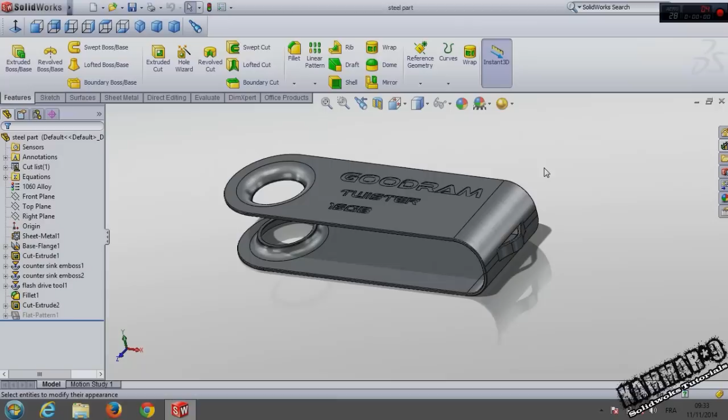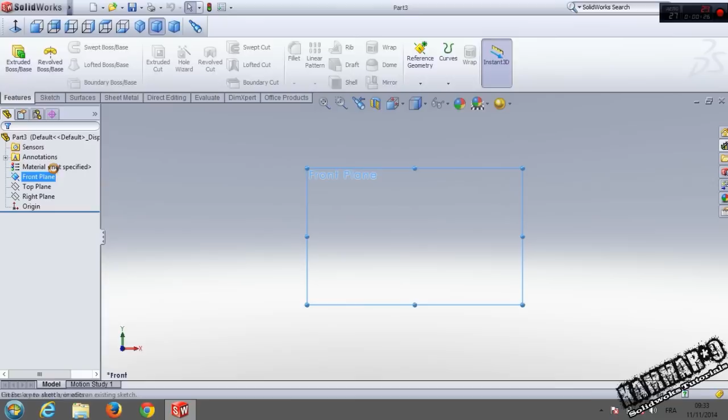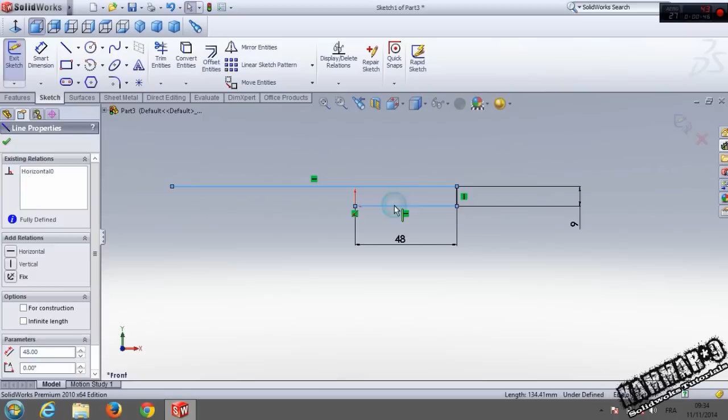Okay, part, choose the front plane, sketch a line from here and add dimension. We have 48 here, we have 9 here, and add the relation: this one and this one, make equal. Now I will add a sketch fillet with 4 millimeter to each.

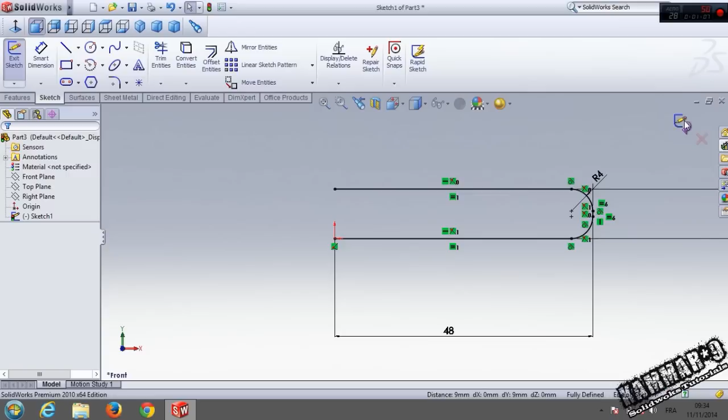Validate, and now go to sheet metal. If you have not sheet metal here, click right and choose sheet metal here. Now go to base flange/tab and put 0.5 here and 16 here.

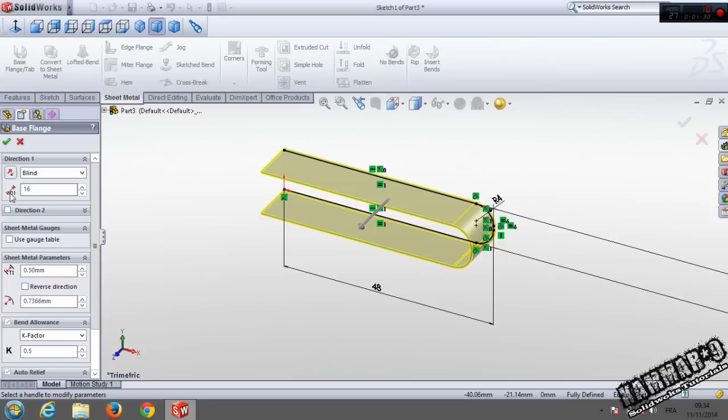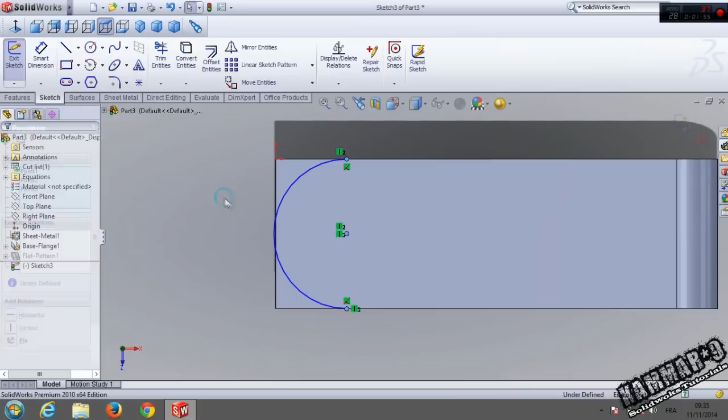Click OK and choose this surface, and go to sketch arc, sketch an arc here, and add the relation with these 3 points, make vertical, and select this one and this one, make tangent.

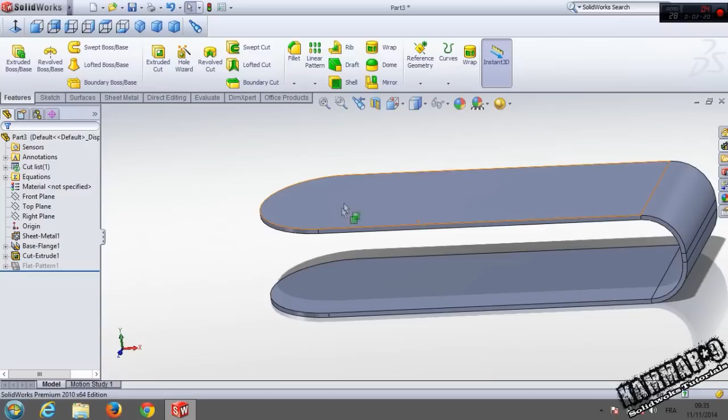To do that, go to design library, open design library, go to forming tools, go to emboss, circular emboss... or it's not a circular emboss but a countersink emboss.

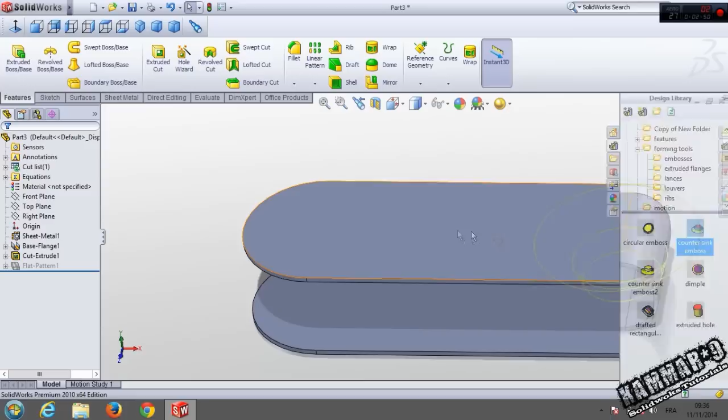OK, and click and drag to this surface, click finish, and go to sketch to position it, go to normal.

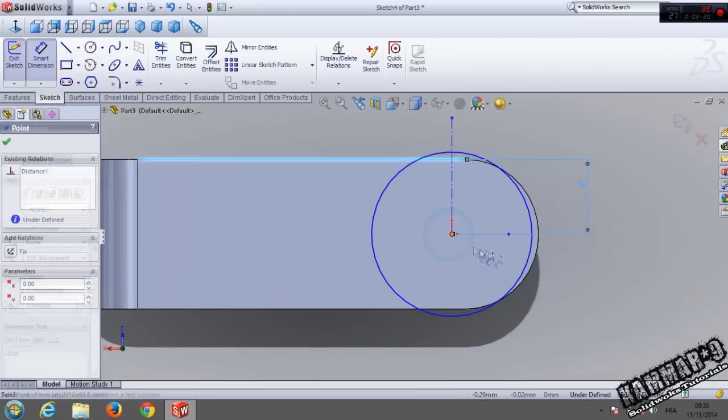Add the smart dimension from here to here. We have 8, and from here to this point we have 8. OK, and validate from here. And now if you're clicking here, we have all the dimensions of the tools. You can modify it.

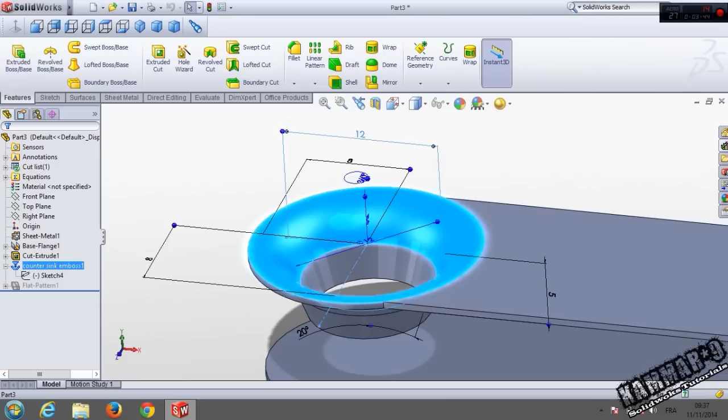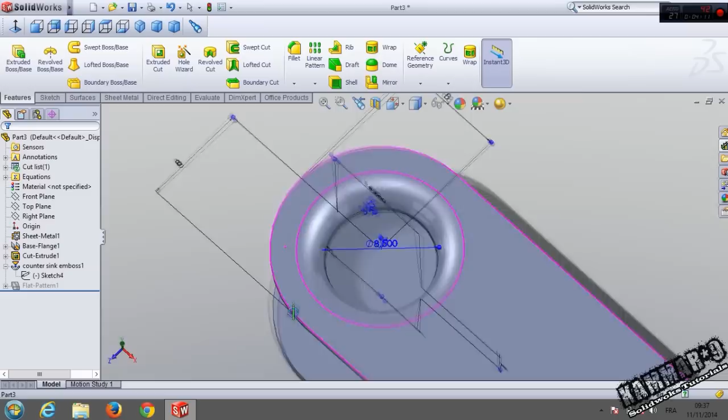OK, let's put here 8.5, and here 2, and here I have to put 5, and the radius is 2. I think it's all what you have to add.

The same thing, click and drag in this surface, click to edit, sketch, normal, add smart dimension from here to here. We have 8, and from here to this point we have 8.

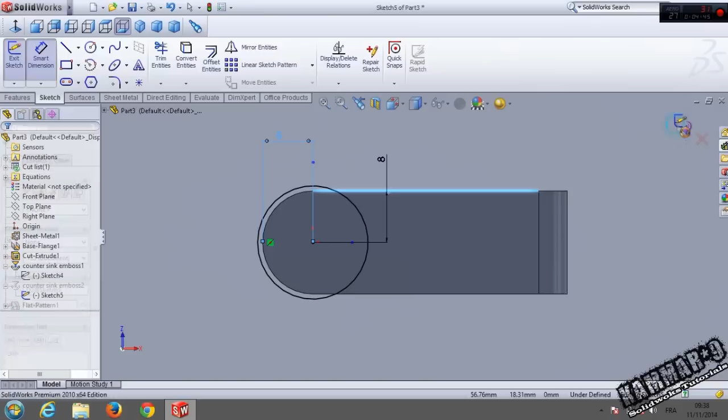The same thing, clicking here: 12 is 8.5, the 5 is 2, and 20 down to 5, and the radius down to 2. Okay.

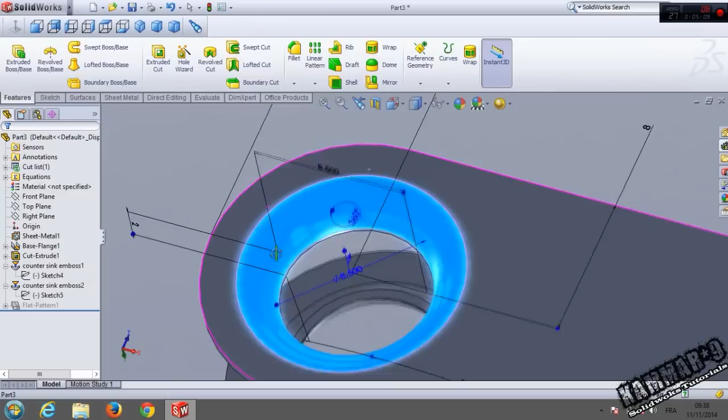Now go to your folder, part 3, save part 2. Okay, and let's create a new assembly.

Click here to keep visible. Choose the body, the first, insert component. I don't know what's the problem. I will close this.

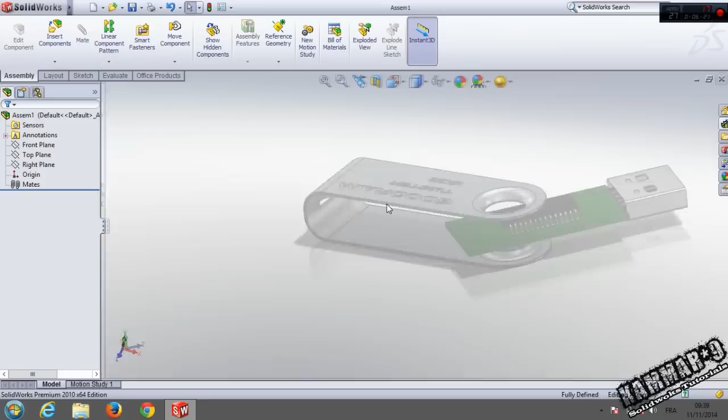Okay, and insert the circuit and the steel part, and let's add some mate here.

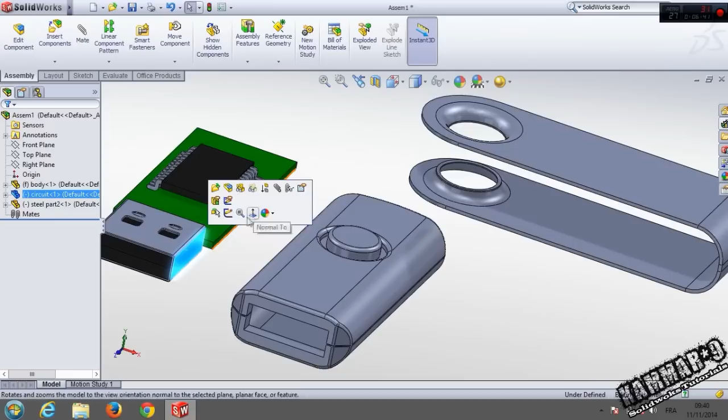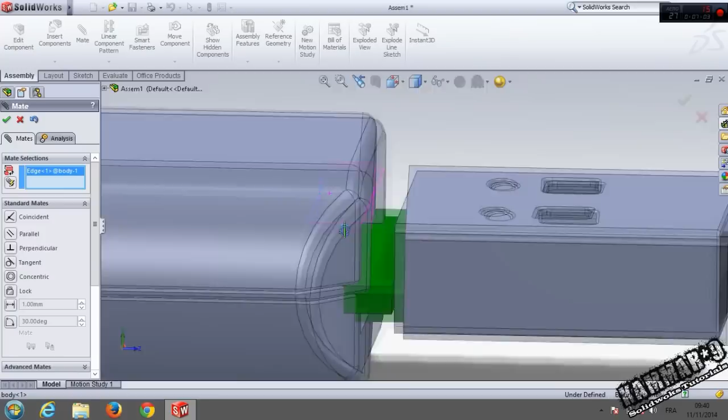Click in this surface, mate, and this surface. The second mate is clicking in this surface and this surface. Okay, and the last is clicking in this edges and this surface. Clicking OK.

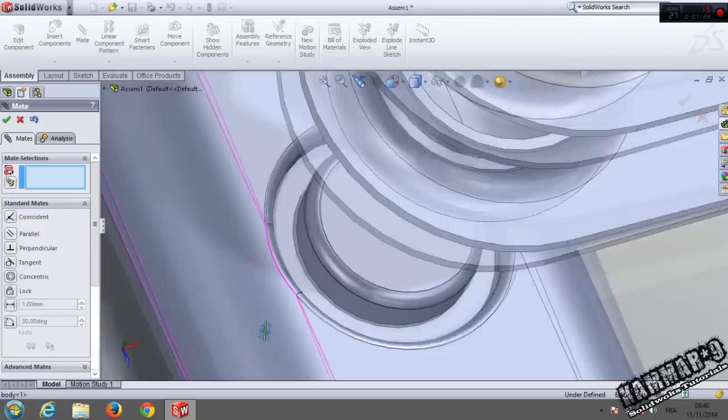And go to this one. Click in this surface and this surface. Click OK, and click in this surface and this line. Click OK.

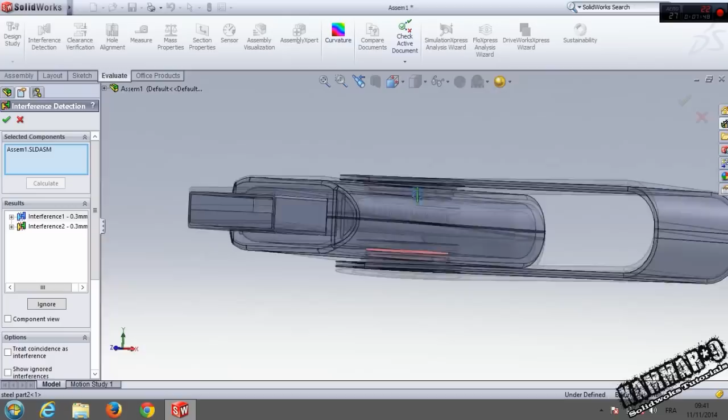Now let's see if we have an interference, to evaluate. Interference detection, calculate. We have just a little interference here, because if we measure this from this to this, we have 0.3, and from here to here we have 0.3.

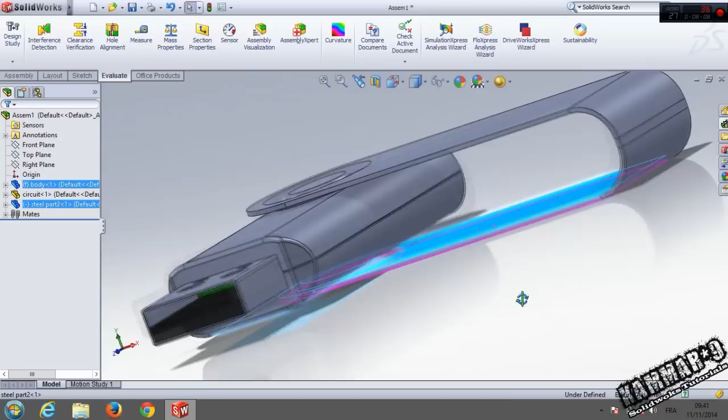And the problem, it's just a little force in this plastic.

Let's go ahead and add the forming tools here. We will create our own forming tools, because the form of the original part... if you can see here, as you can see here, we have forming tools. Okay, it's not here. Let's create one.

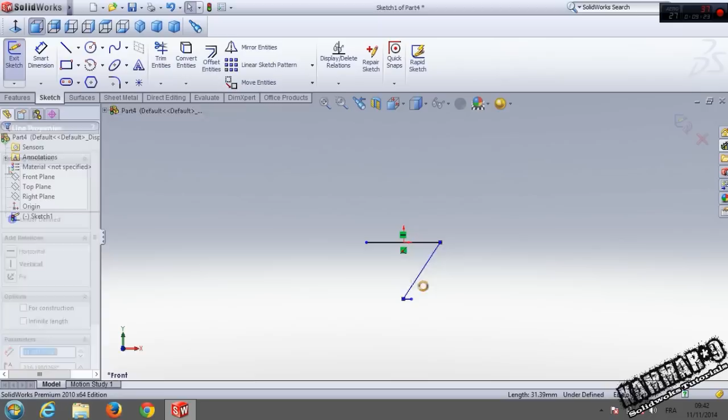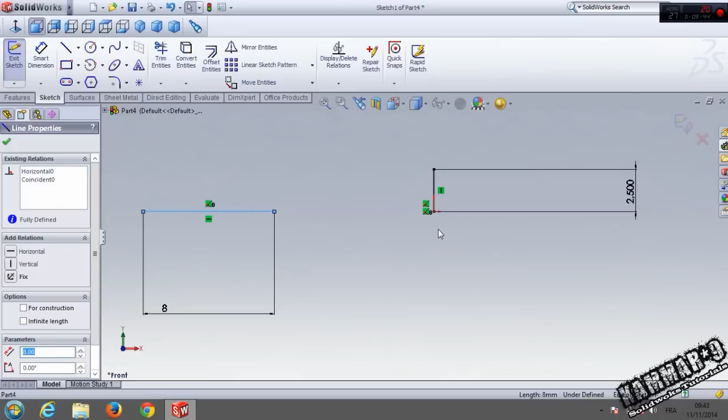To do that, go to your part and go to new file, new part. Okay, and choose the front plane, for example, sketch, and sketch line here, one line, not 3, and add the new line here, and add the dimension 8 here, and 2.5 here. Select this one with the keyboard, press Ctrl, click in this point, make midpoint.

Switch this one to construction, and with arc, click here and here the same thing.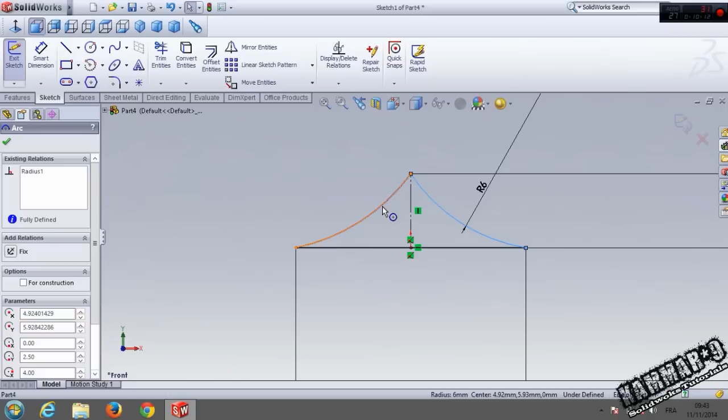On the side, add the dimension 6 here, click here with the keyboard, press Ctrl, add equal, and with sketch fillet add the fillet with 2 here. Click OK, and we have finished our part.

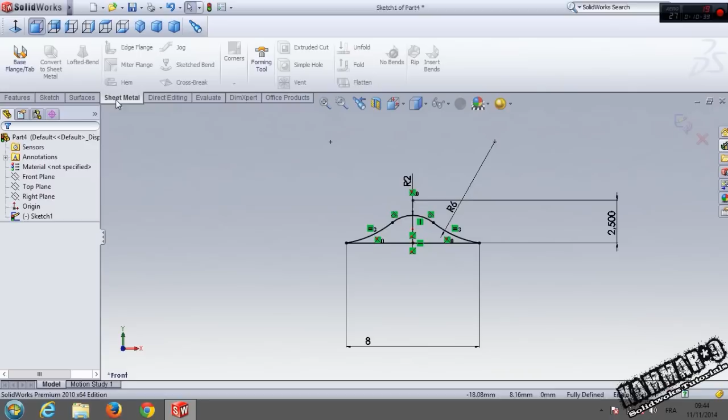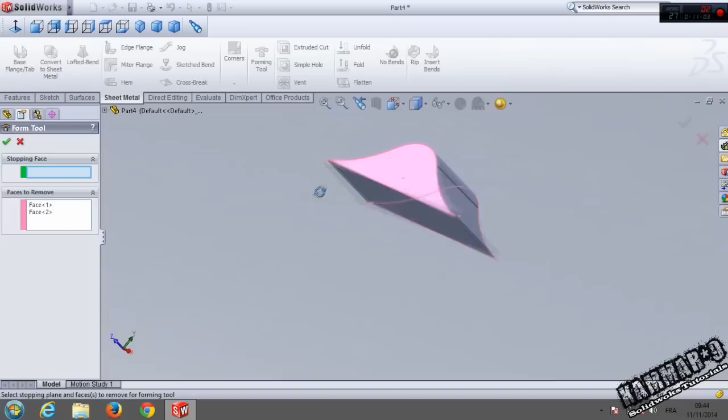Let's go to sheet metal forming tools. No, it's not forming tools yet. Go to feature, extrude boss, put 2 millimeters here, and go to sheet metal forming tools. Select this face to remove, we have to remove this and remove this in our part. Now select this, the force coming by this face. Click OK, and we have our tool.

If you save it, don't save it in part. You can save it in part to modify it. Let's go and save it first in form tools. Choose the form tools here.

In Solidworks, go to library, design library, go to forming tool, double click on forming tool. You can add your new folder. Click, tools of me, for example, click OK again, put here tool for flash disk, okay, click OK, and now return to your part.

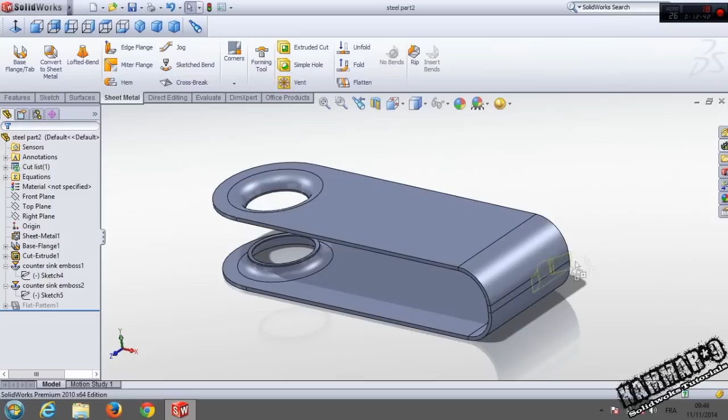Go to design library, go to forming tool, tools of me, click in this folder, and you have your tool here. Click and drag. No, it's not click, you have to return this. Click and drag, click, close this, and your tool is forming here.

And you can just add the position, and this 0.5, and from here 8, because we have 16 here. Click OK, and I will add some fillet to nice view, 0.1.

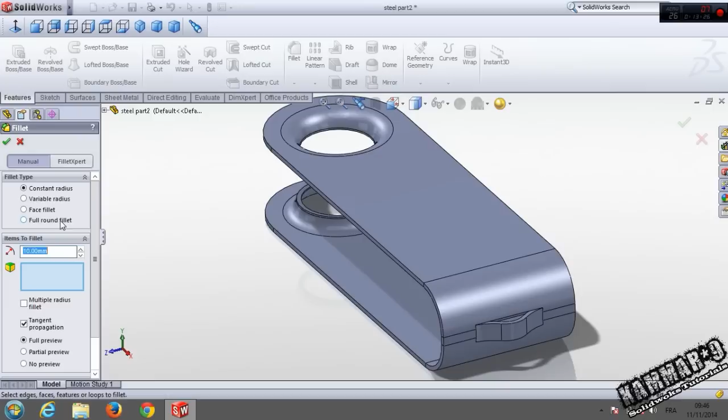Okay, same thing here. Same thing here. Click OK, and I will add material. Go to aluminum alloy, choose one from here.

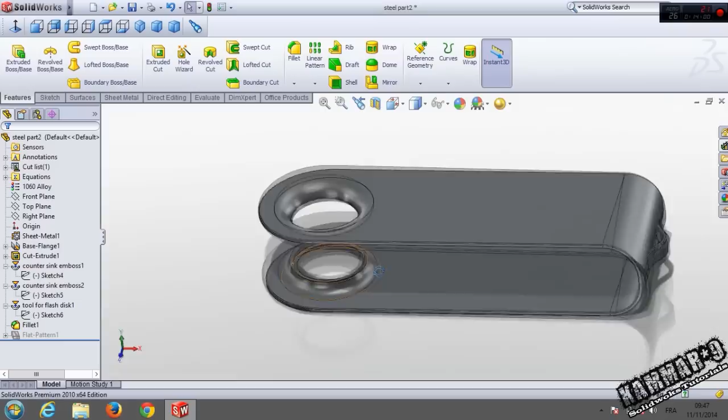Okay, and you can use this if you want appearance. Go to metal, aluminum, go to body, and we have aluminum.

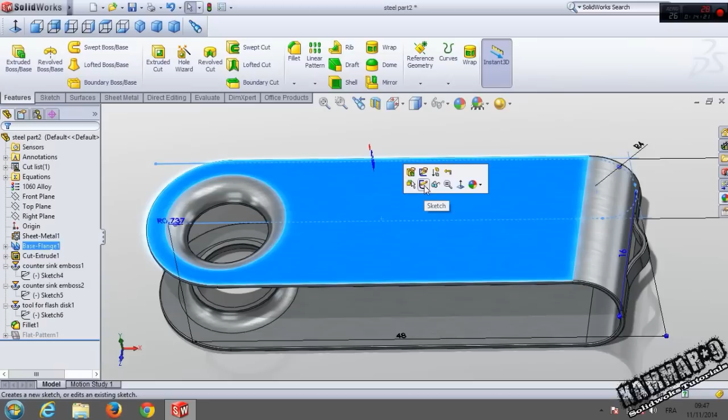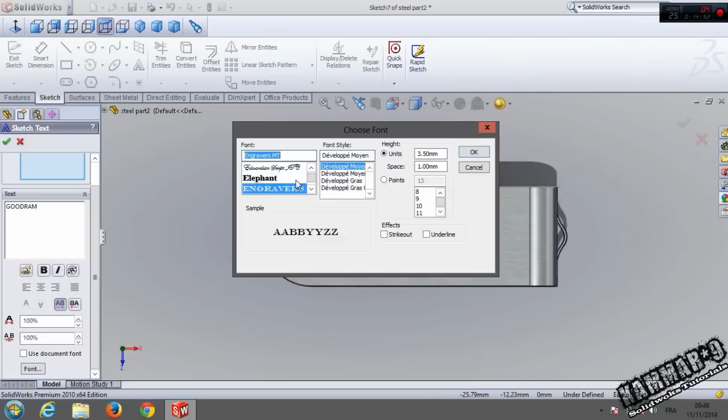And the last thing is to add a text here. Go to sketch and go to text, write 'GOODRAM' here, and go to font, choose. I have downloaded this character font from the web. You can find what you want.

Put 8 here, and you can put this one here. The second text, the same thing: twister. I don't know what's the meaning of it. Twister, 16 gig.

Let's go use the command font, choose here 6, and go to choose the font. I have a good font here.

You can use what you want, or you can download it, and put it in the folder font in Windows.

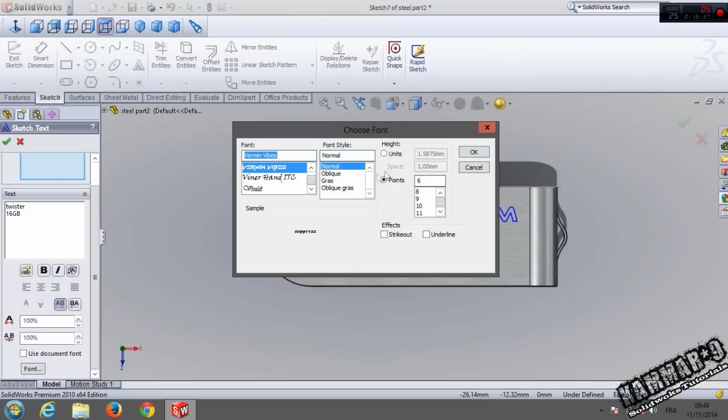Font in the C drive. I think it's not here. Yes, I think this one. Let's see if we use this. Okay, let's use this one.

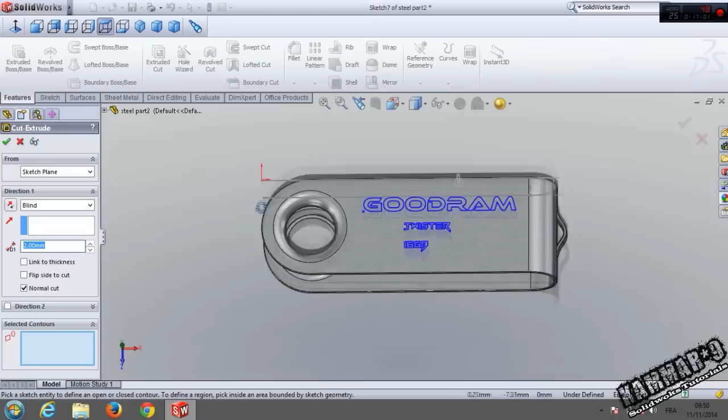And go to feature, extrude. We have a problem, I think, here. Yes, because this font it's not too good. Double click on it, I will choose another.

Let's choose this one. What's the same as what I have earlier? Twister. Let's see what we can get with this. Extrude.

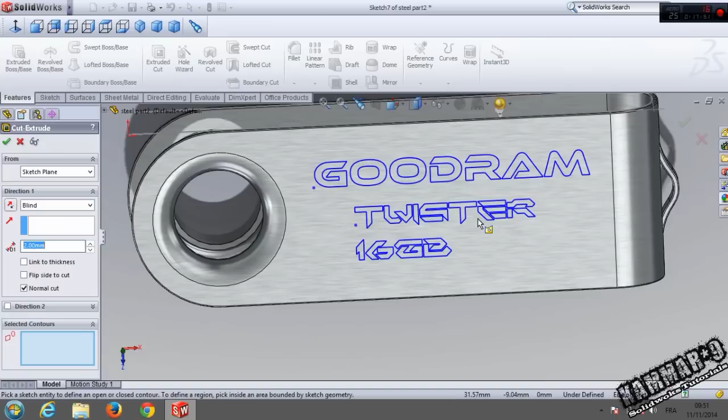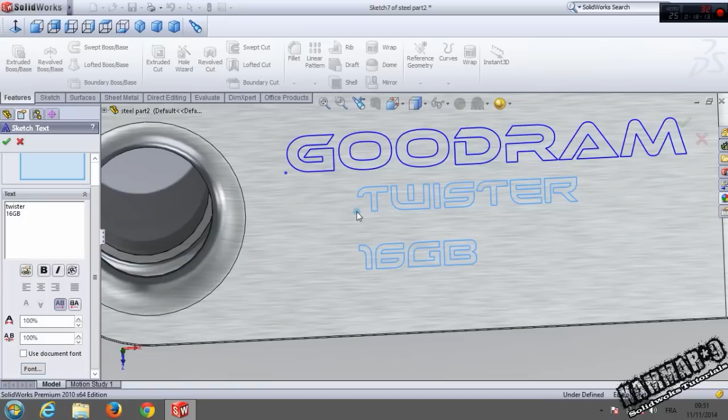The same thing. Double clicking, font, okay, I think it's this one. It's good. Go to feature, extrude.

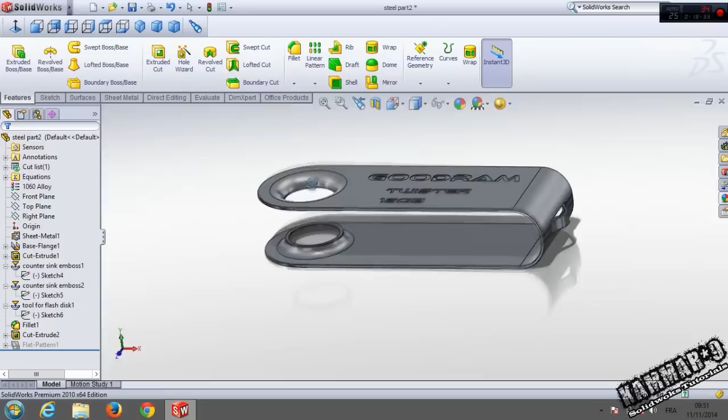Okay, this one have put 0.1. Okay, and we have our part finished. Save it.

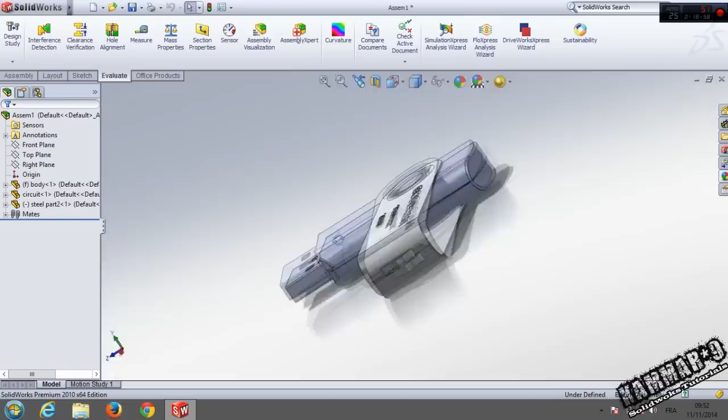We can close it. You can save this part to edit it next time. Okay, I close this, and we have our USB flash drive finished.

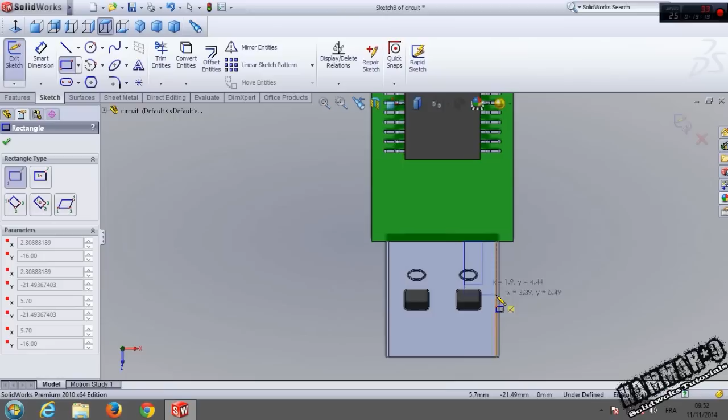And it's just if you want to add here some editing, is 1 millimeter. Okay, select 2 of this.

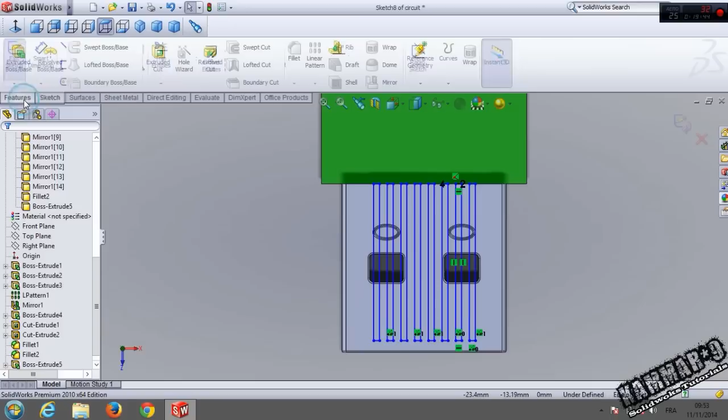Switch 2. Okay, click OK. Go to feature, extrude with 0.2, and don't merge it. Okay, validate from here, close it.

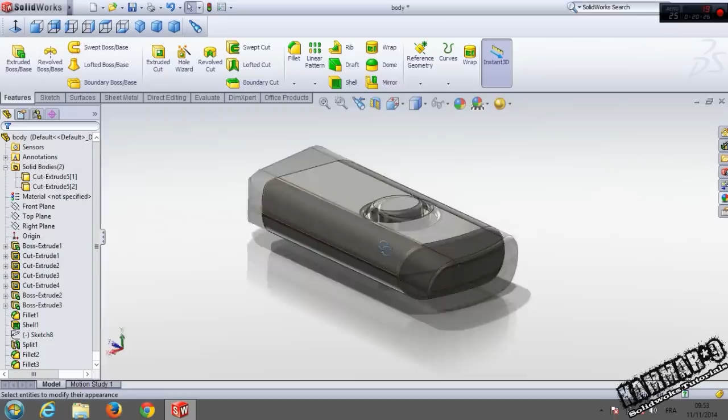And you can add what you want to this. Go to appearance, steel, polished steel, the same thing, and this part. Okay, validate from here, and we have our flash drive finished.